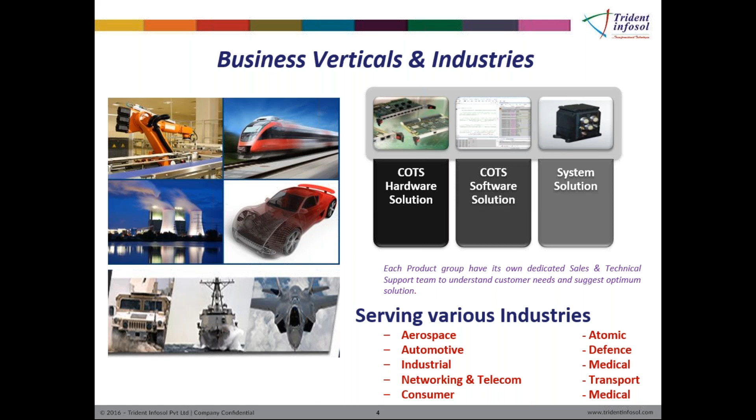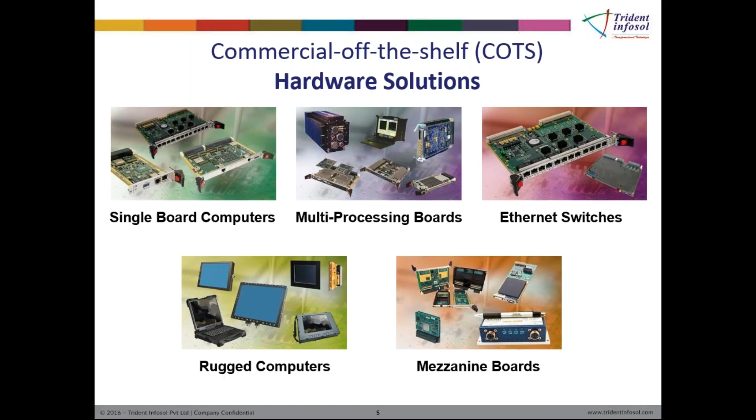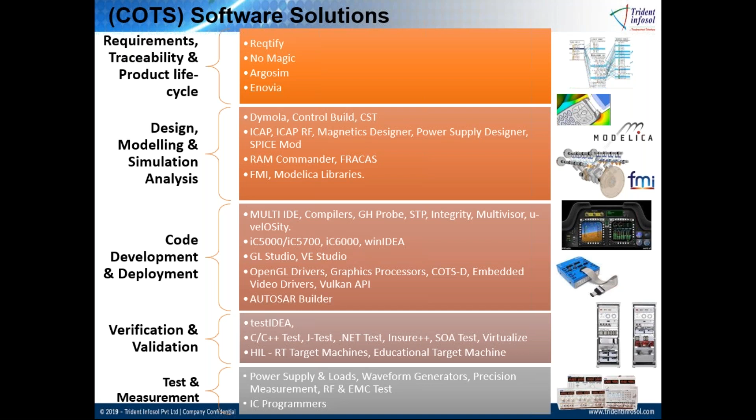In requirement stage, we have products like Reqtify, NoMagic, Argosim, Enovia. And in the designing stage, we have Dymola, CST, FMI, RAM Commander, and a lot more. In the code development stage, we have compilers, debuggers, MULTI IDE, integrities, and AUTOSAR Builder. These are some of the products which we have taken from our list and we have showcased here for your reference. And in the verification and validation field, we have hardware in the loop, RCP, testIDEA, Insure++, and C++ test also.

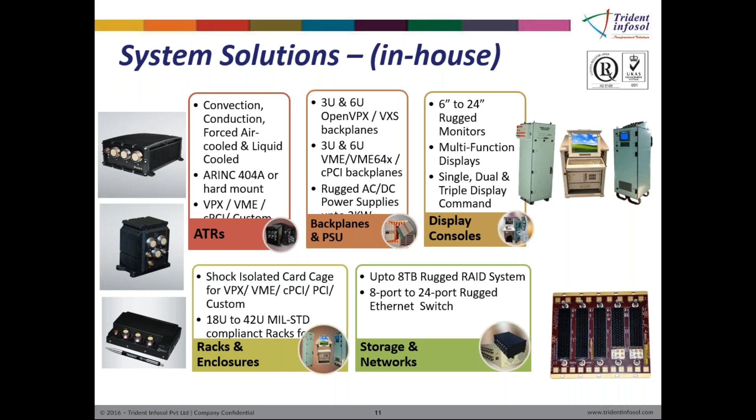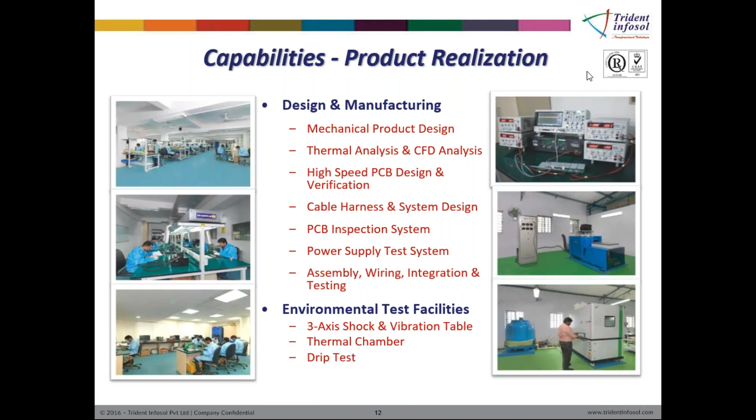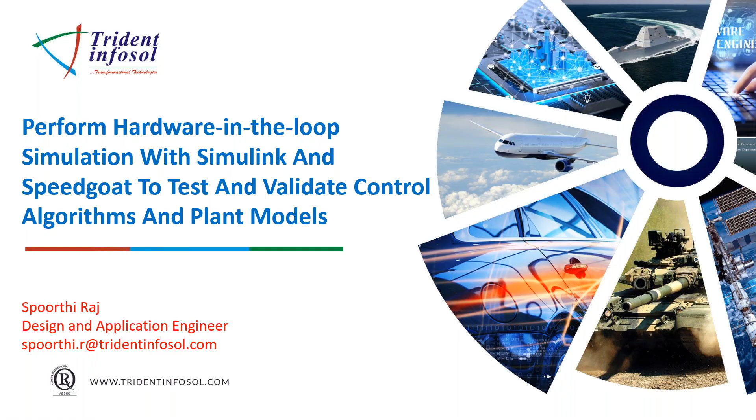So I welcome you all for this webinar, Perform Hardware in the Loop Simulation with Simulink and SpeedGoat to test and validate control algorithms and plant models. In today's session, we are going to discuss concepts of real-time simulation and testing, RCP and hardware in the loop workflow, Simulink Real-Time, and what are the SpeedGoat target machines and I/O modules, some of the user stories, and at last, we are going to have question and answers. You can all drop your questions in the chat box, and we will take the questions at the end of the session.

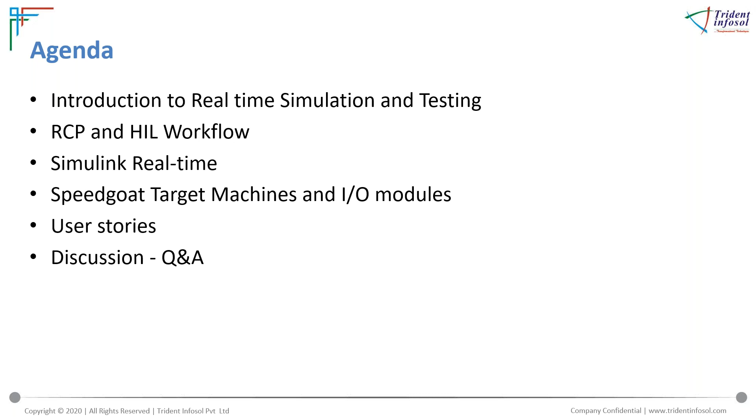So in our everyday work, we frequently come across the word model-based design, which is mainly used in order to develop any embedded system. In this particular V development cycle, I have taken two types of stages which come in real-time testing. This involves rapid control prototyping and hardware in the loop simulation. Rapid control prototyping comes in the early stages of the design cycle. In this case, if the controller is not available with us, we can still check how the entire control loop will work by simulating the controller algorithm.

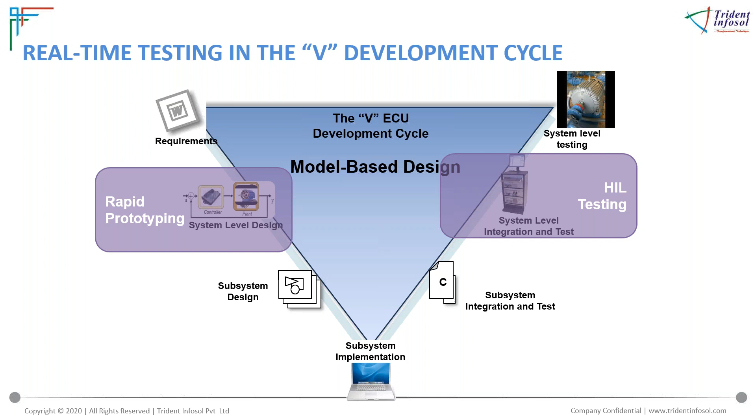Moving forward in the design cycle or V development cycle, we come across hardware in the loop simulation. In hardware in the loop simulation, we will be simulating the plant system in order to avoid any danger or hazardous condition, and we'll see how the system works in a closed loop. So let us see how exactly the workflow is present in hardware in the loop simulation. Any control system which is modeled in Simulink consists of a controller model and plant model.

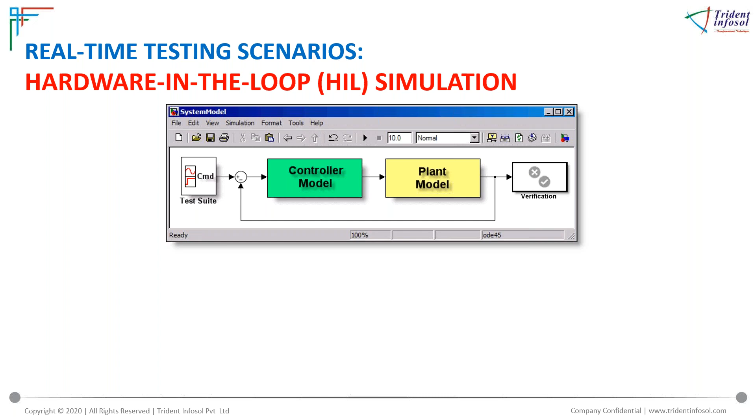So when I'm talking about hardware in the loop simulation, I will have an actual controller or ECU with me. But in this case the plant is actually simulated on the target machine, and the controller part is entirely replaced with the hardware IO drivers. So, with the help of the IO modules present on the real-time target machine, we'll be able to communicate in real time with our actual controller or ECU. This is the workflow for hardware in the loop simulation.

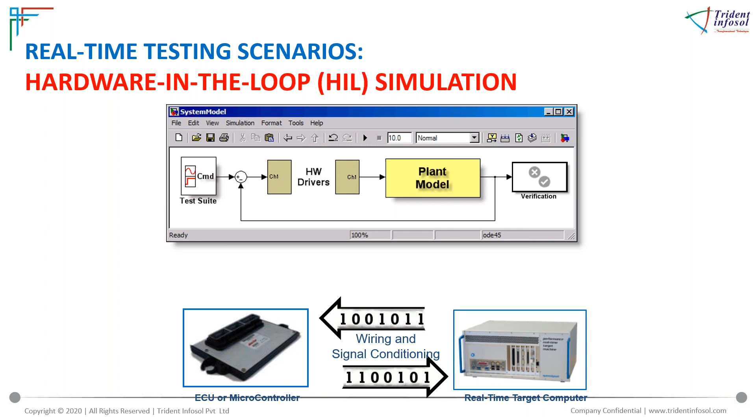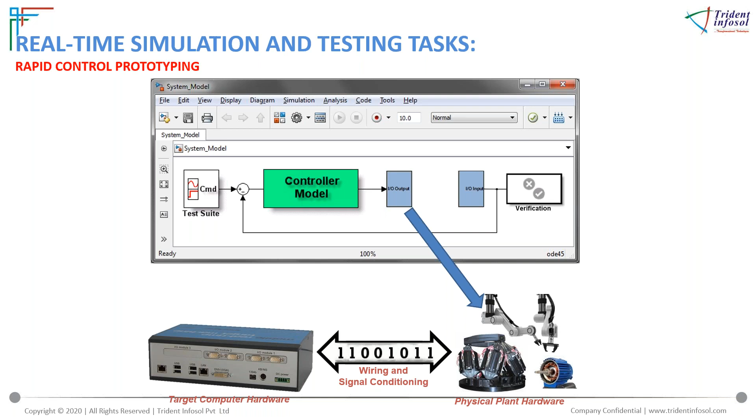So, coming to rapid control prototyping, which is another type of real-time simulation. In this case, the physical plant will be present with us, and we'll take the controller model or controller algorithm and put it on the target computer. In place of the plant model, we'll place the IO driver blocks, with the help of which we'll be able to talk to our controller, which is simulated on the target machine in real time. So these are the two types of real-time simulation and testing which we can see in the V development cycle. So you might have a question why we should really do real-time testing.

So the reasons are it is very easy to detect design flaws at the earliest possible stage. With the help of the target machines or hardware in the loop simulation, we will be able to tune our parameters in the model, and also we'll be able to monitor or log those signals, which enables us to detect the design flaws at the earliest possible stage. And also it proves that our embedded implementation of algorithms works well on the required target hardware.

The second point is we can perform fully automated extensive testing. In many scenarios, it is really dangerous, or it imposes limitations, to test on a real system. But with the help of the target machines from SpeedGoat, we can perform and also automate these tests against the requirements. And this testing can go beyond the range of normal parameters, as we are doing the simulation here in a very safe environment. It also reduces the risk of damage to the equipment as well as to the operator.

And at last, it definitely accelerates the time to market. So, many times we can see that while performing the hardware in the loop simulation of a plant and control system, they are actually still developing some of the plant system or the actual system. So it is not really required to wait for the actual prototype to be available in order to test our plant system. So these are some of the benefits that we are going to get by doing real-time simulation and testing.

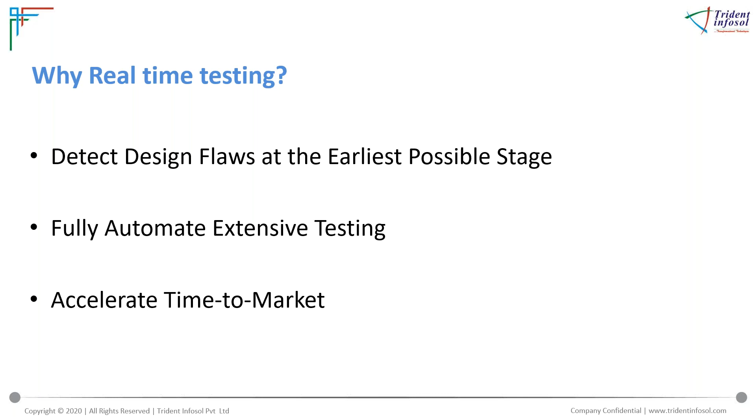So what is SpeedGoat then? As I told you, SpeedGoat is a company which provides solutions for real-time simulation and testing. Basically, it's a Switzerland-based company, and it is also an official partner with MathWorks in order to provide a complete solution for real-time simulation and testing. On the software side, we can see the products from MathWorks, which involve different toolboxes for real-time instrumentation or automatic code generation, and also Simulink Test, which is meant for test automation.

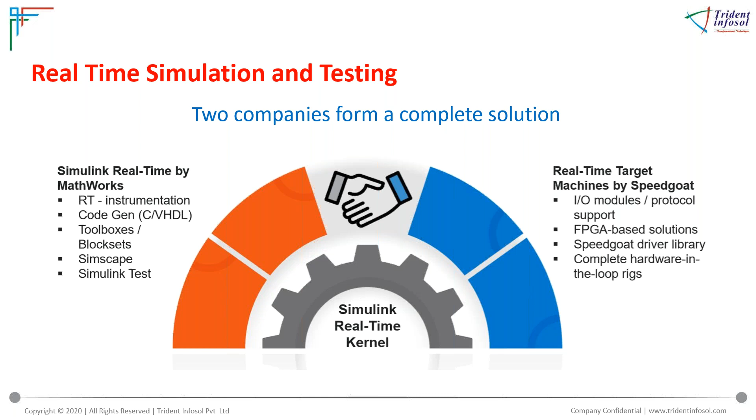And on the hardware side, we can get the target computer from SpeedGoat, which consists of CPU, FPGA, or IO modules per customer need, and also communication protocols. So, along with the SpeedGoat target machine, the customer is also going to get SpeedGoat driver blocks. In between these two, you can see an interface called the Simulink Real-Time kernel, which will be mainly responsible to work in real time.

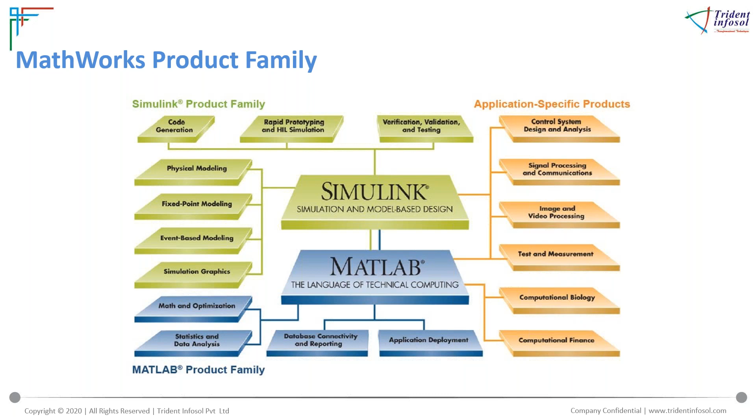As I told you, these are the different product families available from MATLAB and Simulink. Here, Simulink has a particular product family for real-time simulation. The main toolbox which is responsible to carry out the real-time simulation is Simulink Real-Time. It mainly helps to take our design, which we are simulating on the desktop in the earlier stages, to real-time execution on the target machine. It actually takes care of three main steps in order to carry out a hardware in the loop simulation or rapid control prototyping. The three main steps involved are code generation.

With the help of Simulink Coder, we will be able to automatically generate C code from the Simulink model. And then Simulink Real-Time will compile and link the driver blocks and all the associated subsystems present in the model, and it will form one single file and download it on the target machine via Ethernet cable. So these are the three simple steps. With the help of Simulink Real-Time, we'll be able to take our model and run it on the target computer.

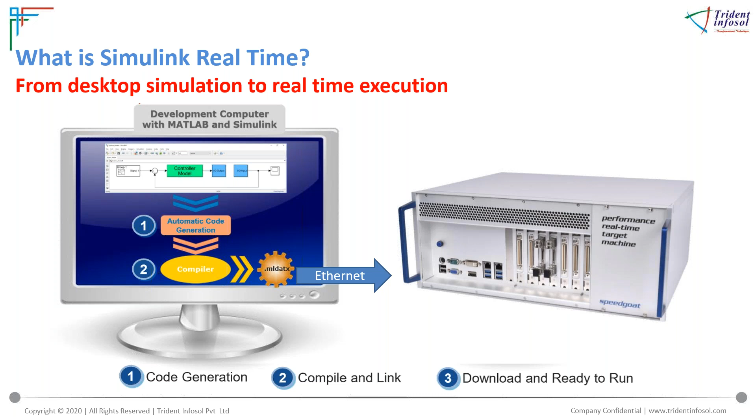Again, with the help of Simulink Real-Time, live parameter tuning is also possible, or we can visualize the signals and execute our controller parameters. We can also log the data back into MATLAB for offline analysis. We can actually have a user interface in order to interact directly with our control algorithms or these models running in real time.

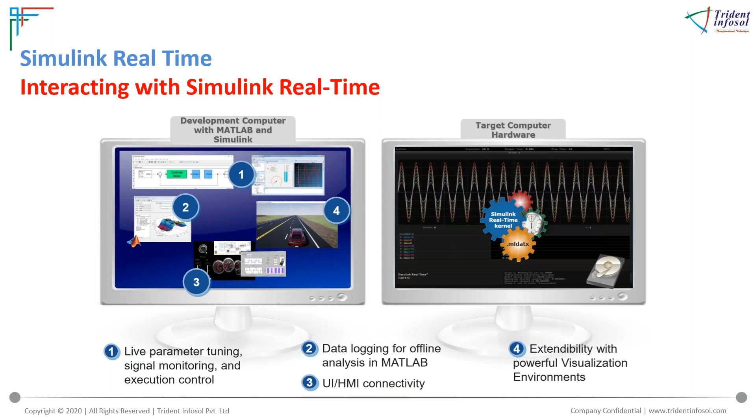Simulink Real-Time also provides the IO driver blocks for the IO modules as well as for the communication protocols. The driver blocks can be easily dragged and dropped into your Simulink model, and you can straight away use them in order to connect with your physical system.

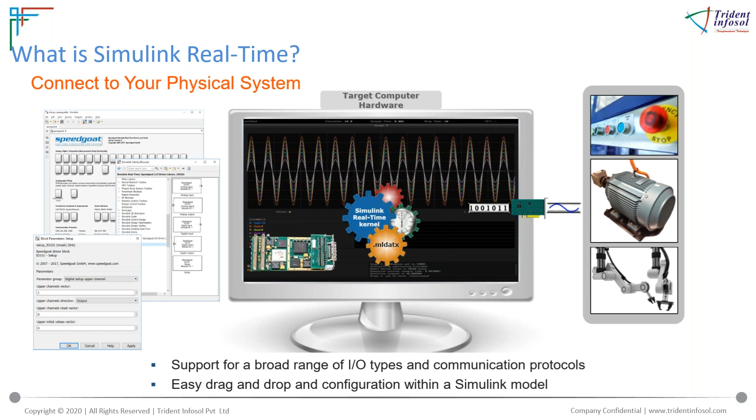The extended features of Simulink Real-Time help us with control and instrumentation of the real-time application. There are two possible ways with which we can actually talk to the real-time application running on the target machine. One is Simulink Real-Time Explorer, and the second one is MATLAB App Designer.

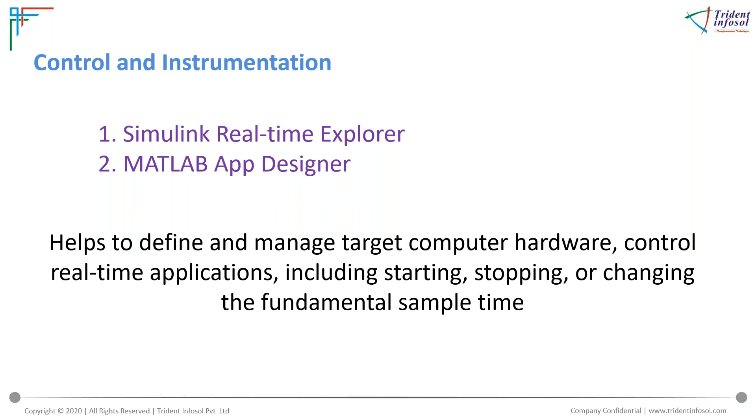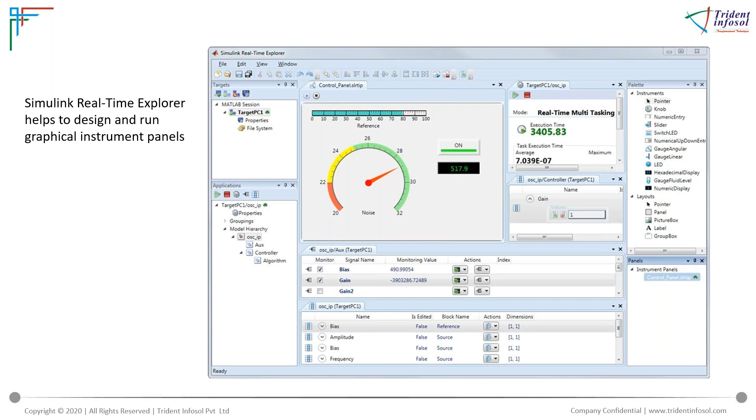For example, we can change the sample time of the model from the Simulink Real-Time Explorer itself. It also gives an opportunity to visualize the signals with the help of real-time scopes. And you can also see the model hierarchy on the Simulink Real-Time Explorer panel itself. This is a brief note on Simulink Real-Time Explorer.

With the help of Simulink Real-Time, we can also make our real-time application run in standalone mode. So what is standalone mode? If we don't want to connect our target computer to the development PC every time, we can run the real-time application on the target machine in standalone mode. We just have to select which real-time application we want to execute in standalone mode, and then pass it to the target machine. Once the target machine is powered up, the application starts executing on its own.

We can also have an instrumentation panel from the Simulink Real-Time Explorer in order to control the real-time application. This real-time explorer panel or the instrumentation, you can actually use it on a system which is independent of MATLAB and Simulink.

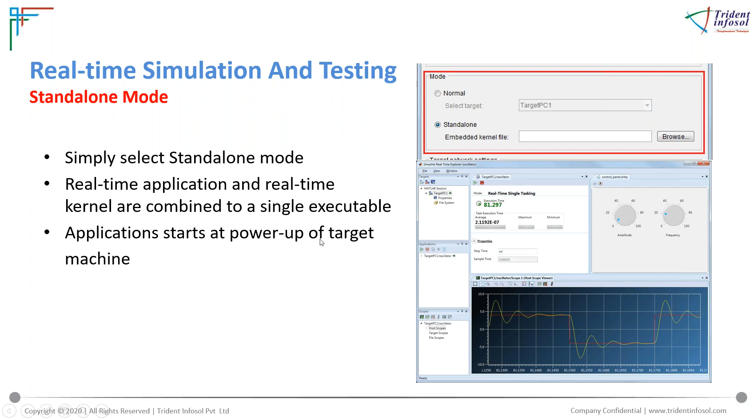The Speedgoat target computer hardware is integrated with Simulink Real-Time. It's ready to use on the desktop, in the lab, or in the field. The driver blocks for all the IO modules and communication protocols are readily provided. With the help of Simulink Real-Time Explorer, we can connect to the target computer in order to manage or control the real-time application execution. It's also possible to make the real-time application work in standalone mode with the help of Simulink Real-Time.

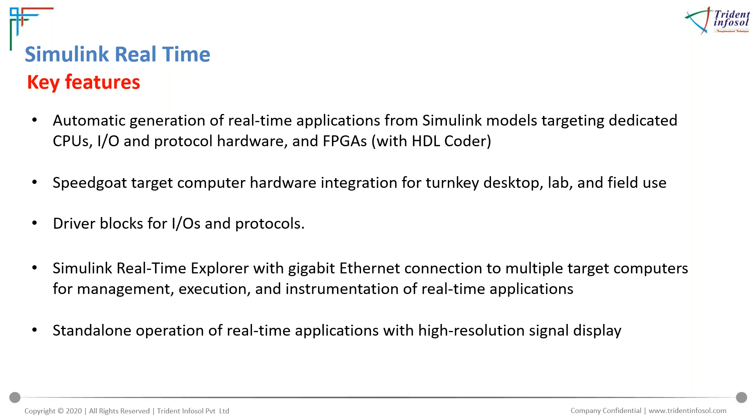So how will the setup be in the case of Simulink Real-Time and the target computer? Initially, we will have the development computer on which all the models and the Simulink environment will be running. With the help of an Ethernet cable, we will connect the development PC to the target computer. Inside the target computer, as I told you, there will be multiple CPUs or a multi-core CPU and also FPGAs or IO cards and protocol interfaces. With the help of those interfaces, we will be able to connect our actual physical system under test. This is a simple setup which involves the development PC, target computer, and physical system.

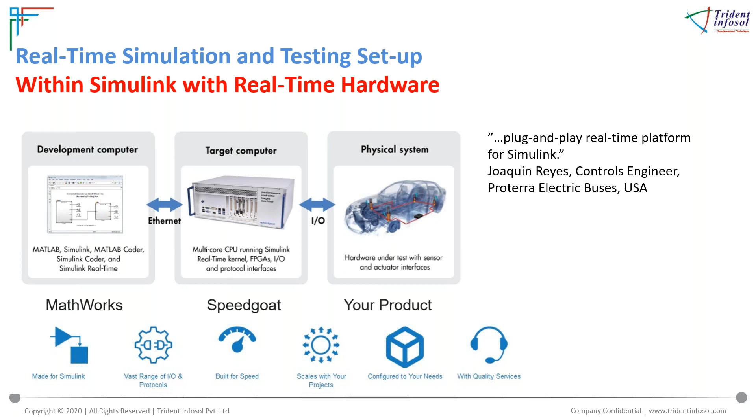Then what are the types of target computers? Basically, Speedgoat provides three main target computers. The target computer workflow will remain the same for all the types; that is, it follows the Simulink Real-Time workflow. Coming to the first target machine, it is called the performance real-time target machine.

The performance real-time target machine will include an Intel Core i7, or it can also have multiple CPUs with multiple cores. If complex applications are to be executed on the target machine, then the performance real-time machine will be most suitable. And with the help of the CPU as well as the FPGA, we can have concurrent execution of the real-time application. Basically, this performance real-time target machine allows 7 IO cards to be installed. Or we can also expand the performance target machine with the help of an expansion chassis. We can also have rack integration where we can integrate 100 IO modules. This is the performance real-time target machine.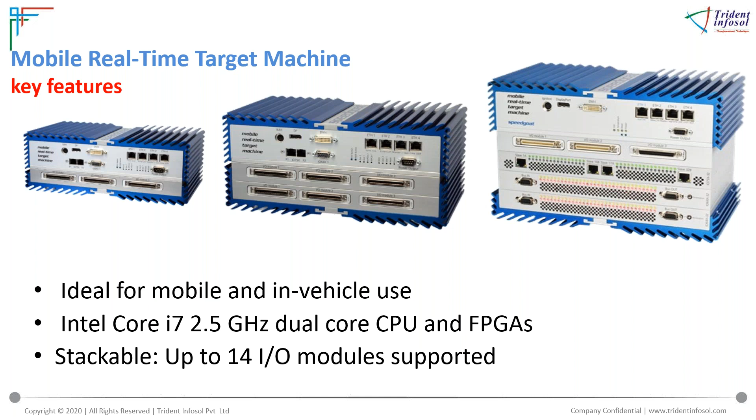The third one, or the entry-level target machine, is called the baseline real-time target machine. Here, the CPU will be an Intel Celeron CPU, and optionally we can also have FPGA cards. This is most suitable for applications which require very few channels or very few IO modules. But here, when I say very few, we can actually have multiple types of IO cards. There are two variants again in the baseline real-time target machine that you are seeing on the slide.

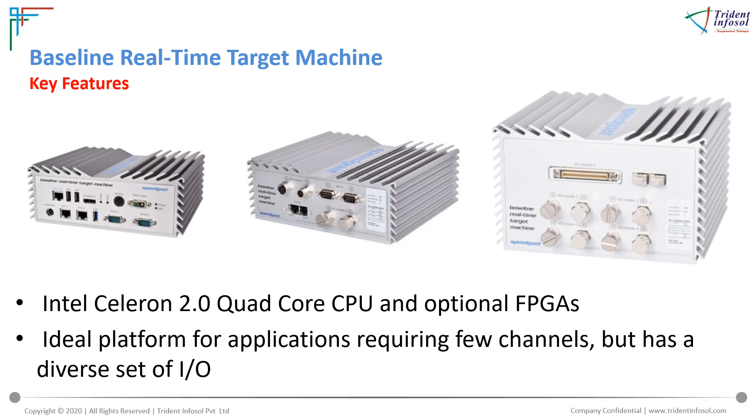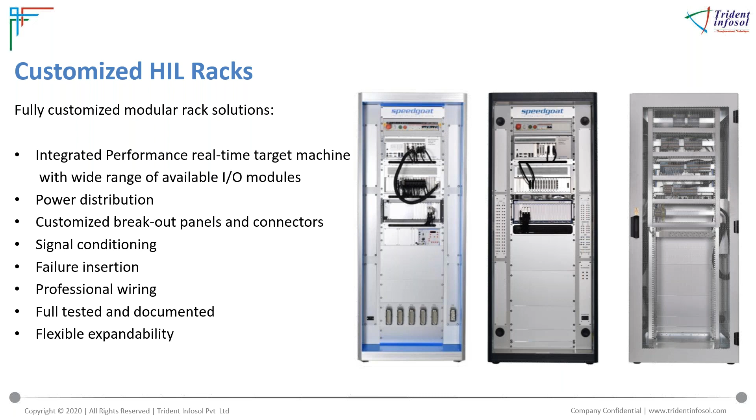This is exactly how the customized HIL rack will look. Here we can see the performance real-time target machine along with different numbers or different types of IO modules. And for each of the IO modules, we can have the breakout panels and also the connectors and signal conditioning. And if we want to see fault insertion or failure insertion, we can also have a provision for this. And this is the HIL rack setup.

On the development PC, there are certain prerequisites which need to be there in order to start using the Speedgoat target machine. That is Simulink Real-Time, MATLAB Coder, Simulink and Simulink Coder. These toolboxes are really required in order to start working with the Speedgoat machine. We can also have HDL Coder; HDL Coder is required when FPGA cards are used in the target machine.

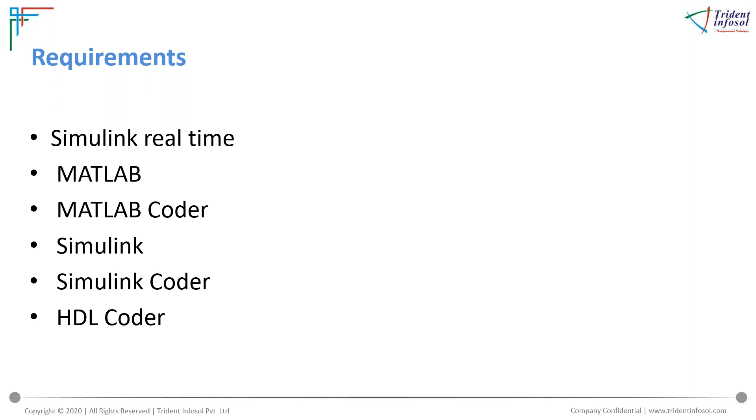Speedgoat actually supports a broad range of IO connectivity and protocols. Here, to categorize, we can see there are multiple cards available for analog input and output, digital input and output. And also there are FPGA cards available in order to implement some of the functionalities like PWM generation, PWM capture, or quadrature encoder, quadrature decoder, and also some custom implementation protocols like I2C or SPI. We also have IO modules for fault insertion, resistor simulation, temperature simulation, and also for battery management systems.

Here, there are different cards which are mainly based on sample rates or the number of channels required based on the application. On the communication protocol side, we also support almost all the protocols required for automobile, industrial automation, the aerospace industry, and multi-purpose communication protocols. To name a few of them, in automobile, CAN FD, LIN, FlexRay, and for industrial automation, Profinet, Profibus, or Aurora. In the case of aerospace, it can be ARINC and MIL-STD-1553. So in a nutshell, these are the different types of IO modules and communication protocols supported.

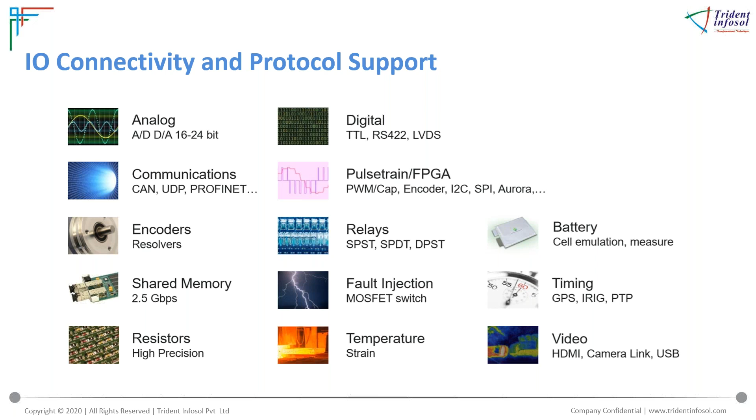There are FPGA cards supported by Speedgoat, and there are 2 types of FPGA IO modules. One is the configurable FPGA IO module and the second one is the programmable FPGA IO module. When the closed-loop sample rates are below 20 kHz, the suitable FPGA will be the configurable FPGA. And for higher sample rates, about 20 kHz to 100 kHz, programmable FPGA IO modules can be used. In the case of the configurable FPGA module, if the requirement is given to Speedgoat, they themselves will give the IP core or code module required to run on the FPGA. In the case of the programmable FPGA, customers can generate the HDL code themselves and run it on the FPGA card. For the programmable FPGA, the HDL Coder workflow is required.

So here is the list of applications or industries where Speedgoat target machines can be used. It is not really restricted to any particular application or domain. Starting from aerospace, where we can simulate controller algorithms, or we can also go to automobile applications, or energy sectors like supergrids and microgrids, and also industrial automation and control. We also have solutions to simulate or test medical devices. And lastly, we also have some solutions available for academia.

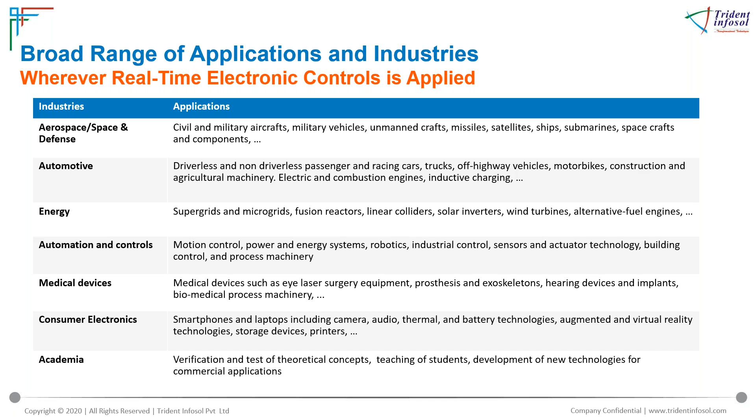Here in the next few slides, we are going to see some user stories. The first story is from Virgin Orbit, which used it for hardware-in-the-loop simulation. LauncherOne is basically a two-stage launch vehicle of Virgin Orbit, and it is mainly used to deliver small satellites into low Earth orbit. Here, the main challenge was that in each mission there will be several crucial separation events. For example, separation of LauncherOne from its carrier aircraft, or separation of the satellite payload from the second stage of LauncherOne.

So it is better to ensure there is an adequate clearance between each of the separation structures. In order to get confirmed about this, they actually used Simulink in order to model the system and also simulate the system in real-time scenarios. Here, the solution, as I told you, they used some of the toolboxes like MATLAB, Simulink and Simscape Multibody in order to model the structural components.

And they also carried out Monte Carlo simulations in order to find out the number of unknowns which may cause the collision. And they also wanted to run the simulation concurrently on the target machine. That's the reason they used Simulink Real-Time and a Speedgoat target computer.

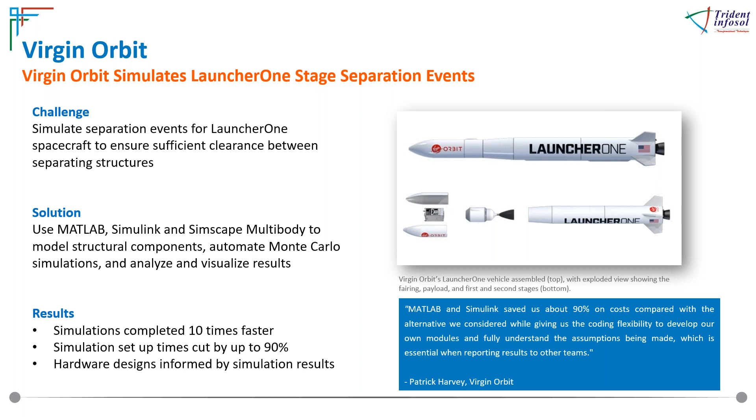So the second user story is from Korean Air. At Korean Air, basically the engineers work to design or develop the flight management and control software for unmanned aerial vehicles. And also they carry out simulations like hardware in the loop in order to verify that their software is working fine.

The main challenge they faced is that earlier they used to hand code the UAV flight controller software. Due to this, they faced some problems, like they found it difficult to program in C by hand for the complex flight control algorithms. And also, they wanted to deploy the controller algorithms quickly on the embedded controller. This manual coding and reviewing and unit testing took too much time and effort to complete. So they were running out of their deadlines.

The solution they found was they developed UAV flight control software using the Control System Toolbox, and also they developed the entire dynamic model of the UAV, which includes landing gear dynamics, responsible for automated takeoffs and landings, with the help of Aerospace Toolbox. And they ran the entire dynamic model of the UAV on the target machine, and their flight control algorithm was running on an embedded controller.

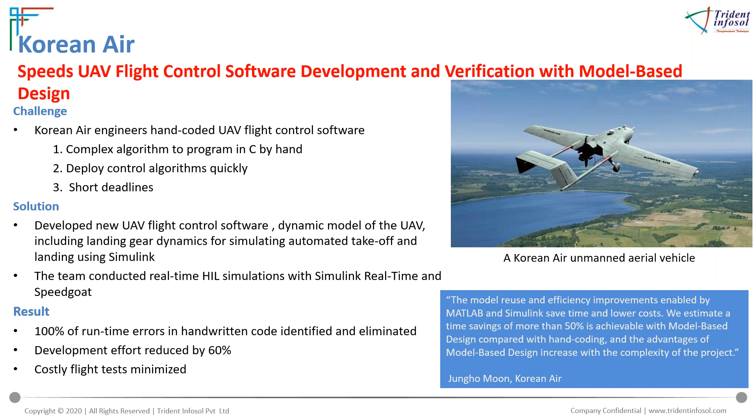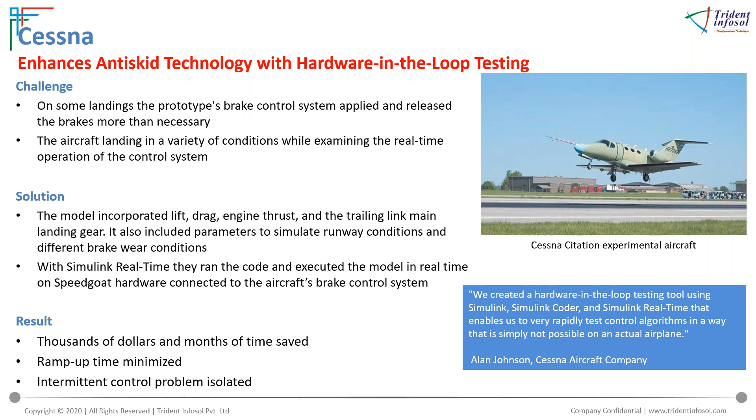There is another user story from Gulfstream Aerospace. Here also, they first modeled their engines in Simulink, deployed those models on the target computer, connected the target computer to their FADEC system, and performed the hardware-in-the-loop simulation.

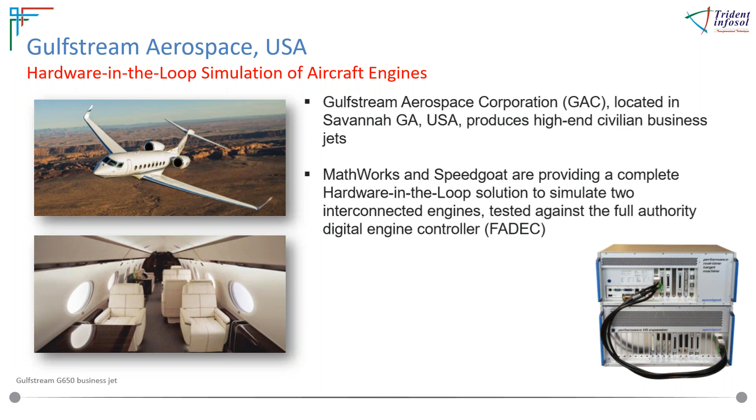Lastly, I have another user story from IntelinAir. IntelinAir has the RD100, a ready-to-fly drone, and this particular drone has autopilot flight software in it. In order to rapidly prototype, simulate and deploy their control software, they moved to hardware-in-the-loop simulation along with the Speedgoat target machine.

First, they modeled a 6DOF Simulink model of the drone, which consists of the motors, the drone's mass properties, propulsion, several sensors, the airframe, etc. Their flight control was again modeled with some of the Simulink toolboxes, with algorithms to calculate the drone velocity, position and orientation, accepting signals from the sensors and giving outputs based on the inputs.

The flight control algorithm was deployed on an embedded controller, and the entire model of the drone was running on the target computer. It is not really good to directly connect the controller to the actual plant and see how the system behaves. So these are user stories where they have simulated their plant and checked how the controller algorithm really works in a real-time environment.

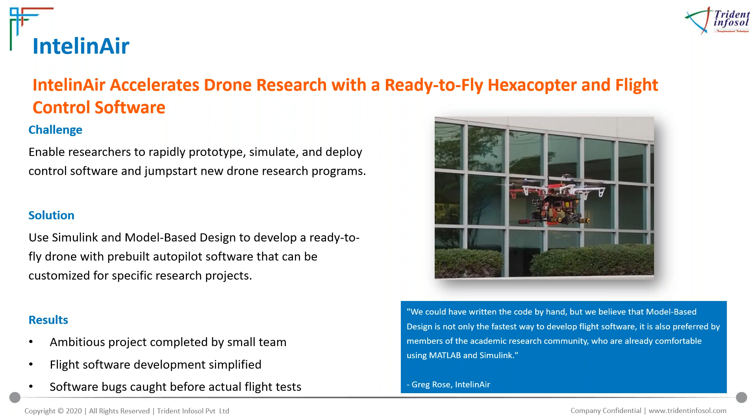So here we are at the end of the presentation. The key points to take away from this webinar: we came to know the two types of real-time testing and the workflow involved, RCP as well as hardware-in-the-loop simulation; the key features supported by Simulink Real-Time; the different target machines and IO modules supported by Speedgoat; and how we can use the target machine to carry out HIL simulations, with the help of the user stories.